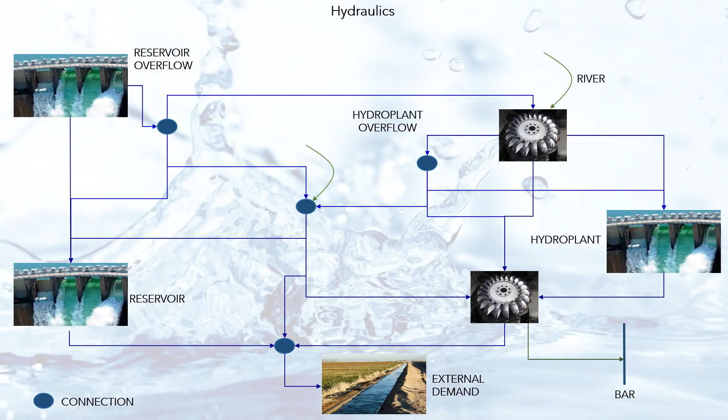Hydraulic model. HAI Water allows any type of connectivity for the topology of the hydraulic system. Modeling of pump storage plants is included, with detailed modeling of pumping stations.

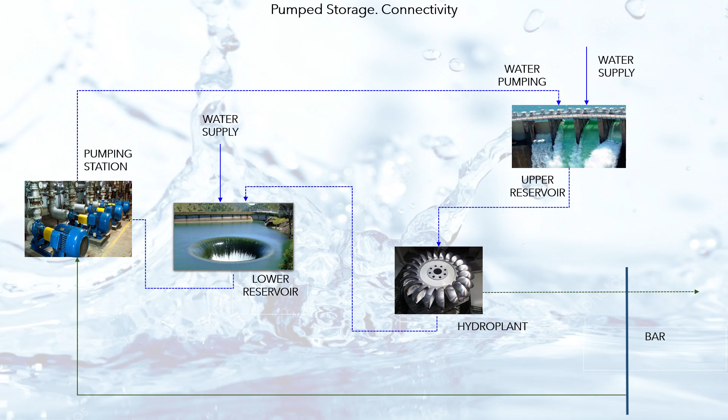If there are special management rules for water resources, such as exogenous agreements for the management of external demands, these can be included in the modeling.

Water systems: subjective penalties. In the modeling of electrical systems, to plan and schedule the dispatch of plants, the use of subjective penalties has been traditional.

This goes back to the beginning of the use of linear models, many of which are still employed, to deal with nonlinear aspects of the real problem.

Some examples of the use of this type of artifice are reservoir discharges, to control early discharges from a low productivity chain to a higher productivity chain, whether technical or economic.

Management of other priority demands, such as irrigation, aqueduct, minimum flows, flood control. Control of the minimum level of tanks to give reliability to the system.

These approaches involve the distortion of the associated dual problem. HAI Water allows the user to select the exact modeling, as an alternative to subjective penalties.

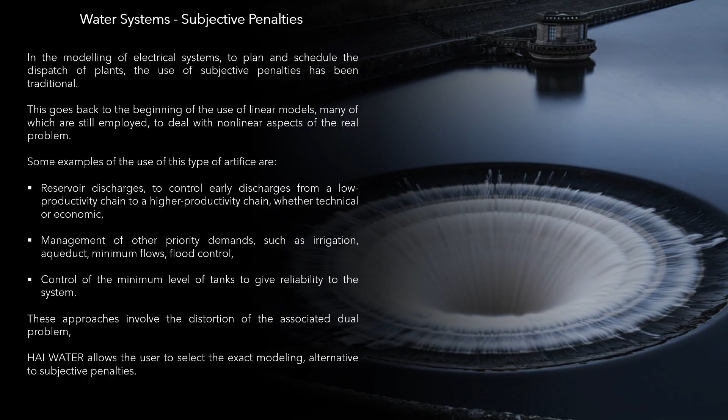The effect on the dispatch of the plants of the penalizing factors of the discharge from the reservoir and the minimum flow, the ecological flow, is presented.

The experiments, and their results, were extracted from a report of users of a dispatch model of normal use in the electrical environment, carried out at the end of the last century.

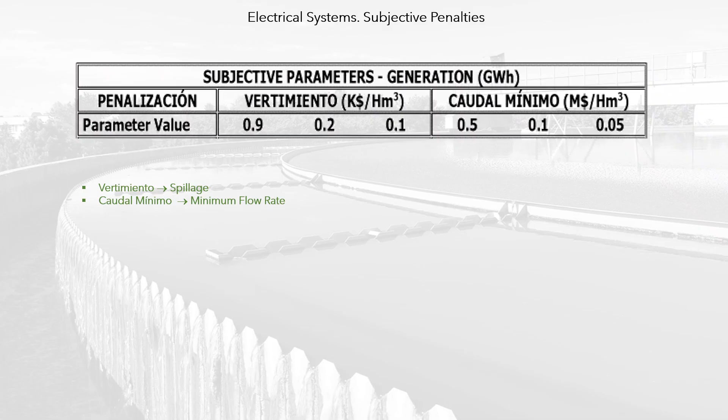For each subjective parameter, 3 values were selected, which are reported in the table. The table presents the average values for generation in each case.

Given the lack of technical support for the parameters, the results depend on the modeler's decision. Assigning the minimum values maximizes hydroelectric generation, which is consistent since, for 0 values, it is equivalent to not affecting hydroelectric generation.

But the quantification of the parameter is not justifiable. On the other hand, maintaining an average flow penalty and maximizing the minimum penalty maximizes thermal generation.

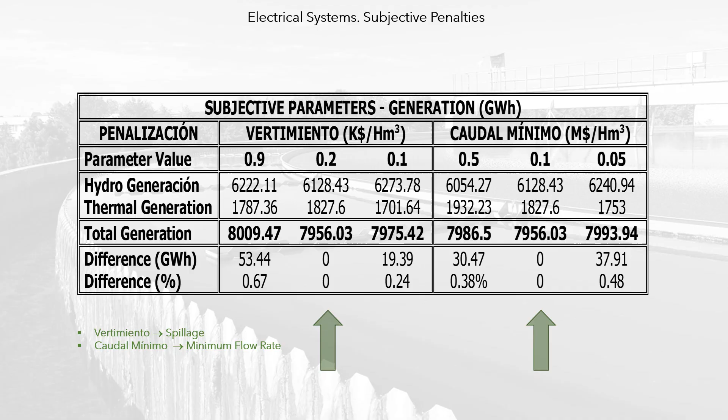The results presented are inconsistent, as a continuous trend would be expected. The quantification of the parameter is not justifiable.

When the water stored in a reservoir cannot be controlled, the reservoir discharges are modeled by a channel, which connects to another reservoir or takes the water out of the system. If these relieved or discharged waters are subsequently used in the system to meet the demand for water and/or electricity,

a mathematical problem can be posed, when the flow implies a greater efficiency in the use of water resources than by the normal route, since they turn the problem into disjunctive programming, which requires the use of binary variables to be solved exactly. The traditional way to avoid the mathematical problem is to include penalties in the objective function,

which does not solve the problem, since in stochastic programming there may be situations in which spillage occurs, but we do not identify it in the results. HAI Water exactly controls discharges from reservoirs and hydroelectric power plants.

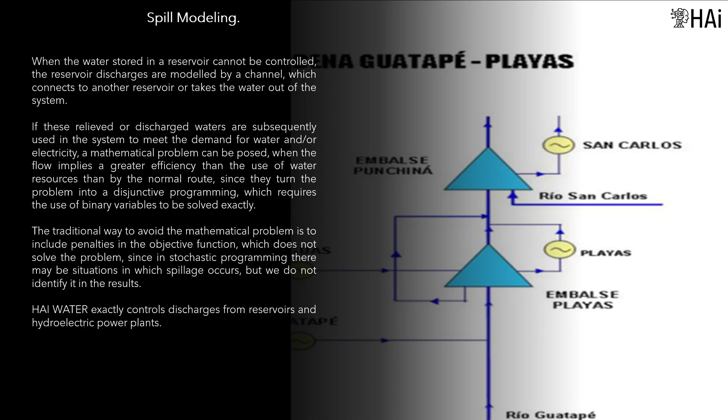Water systems: optimal degenerate solutions. The degeneration of the optimal solution is related to the multiple physical solutions, primal variables, that meet the conditions of optimality and feasibility of the problem.

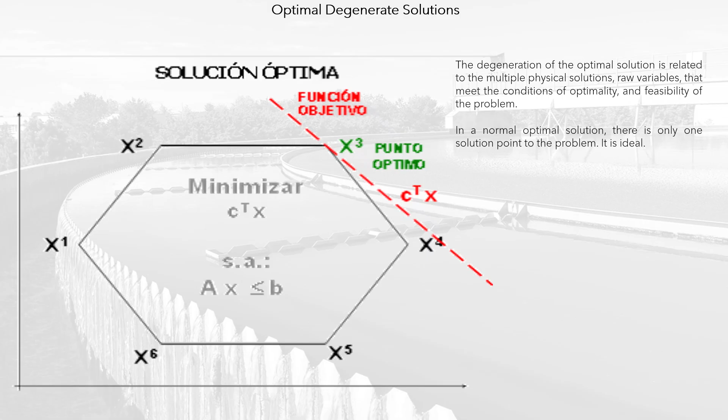In a normal optimal solution, there is only one solution point to the problem. It is ideal. In the degenerate case, the set of optimal solutions is found in the hyperplane that defines one of the constraints, with which it is collinear, or parallel, to the hyperplane of the objective function.

In a convex programming problem, these equi-optimal solutions are in a convex set. The solution algorithms find only one point, among the infinite number of points that make up the convex set.

In the case of hydroelectric systems, the problem arises when there is an imbalance between the supply and demand that the system serves.

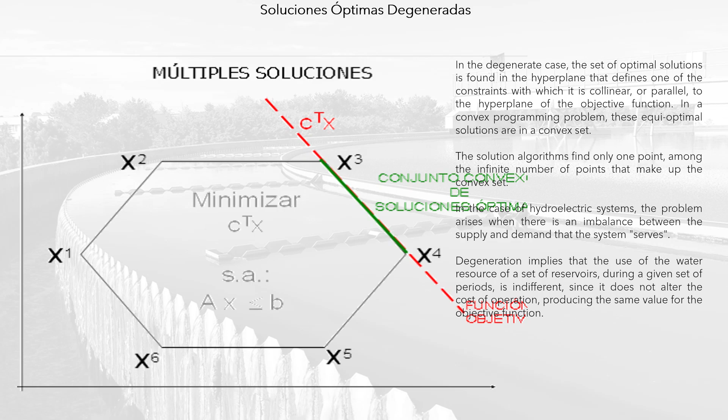Degeneration implies that the use of the water resource of a set of reservoirs, during a given set of periods, is indifferent, since it does not alter the cost of operation, producing the same value for the objective function.

Several important problems arise from degeneration. There is greater difficulty in solving optimization problems, therefore greater computational effort. There is also difficulty in comparing solutions obtained with different algorithms or models, which, being the same, apparently produce large changes while maintaining in all cases the same value of the objective function.

There is a lack of definition of the dual variables at the level of individual reservoirs, and problems in the application of regulations due to multiple remunerations for agents. HAI WATER can solve the problem of the lack of definition of dual variables in chains of storages, physical or virtual, that produce degenerate solutions.

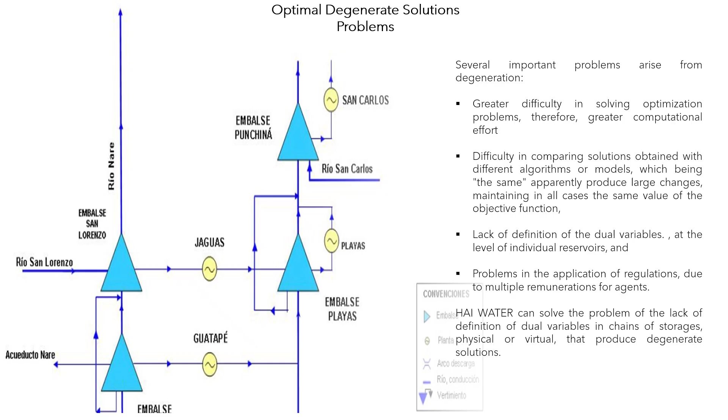Degenerate solutions are presented in reservoir networks, either directly connected or through an electrical transmission system. Degeneration occurs when a reservoir can be used interchangeably, or when it can be used in different periods. As the slack in the system increases, the degeneration increases. Degeneracy is not a modeling problem; it is mainly due to the data that causes it.

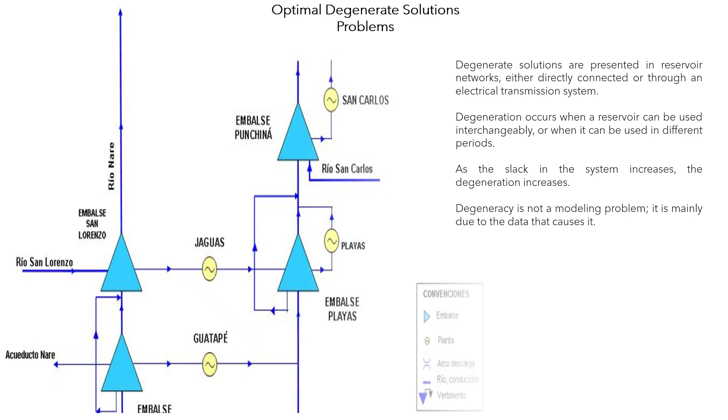Modeling the water system: according to their efficiency for energy transformation, there are two types of hydroelectric power plants. Fixed loading plants consider an efficiency factor for the plant independent of the head of a reservoir associated with the plant. Plants with variable head consider an efficiency factor for the plant that depends on the head of a reservoir associated with the plant.

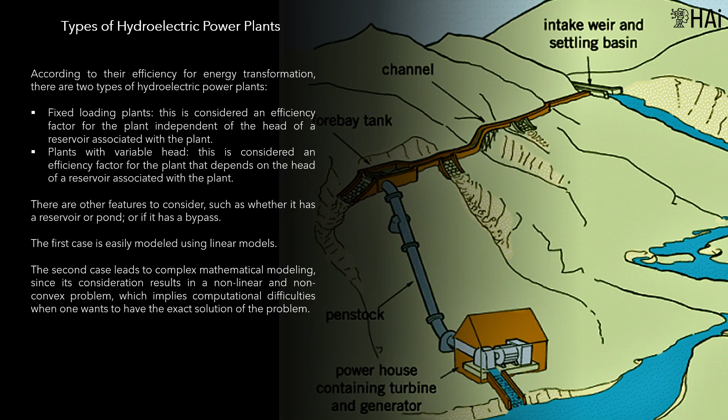There are other features to consider, such as whether it has a reservoir or pond, or if it has a bypass. The first case is easily modeled using linear models. The second case leads to complex mathematical modeling, since its consideration results in a nonlinear and non-convex problem, which implies computational difficulties when one wants to have the exact solution of the problem.

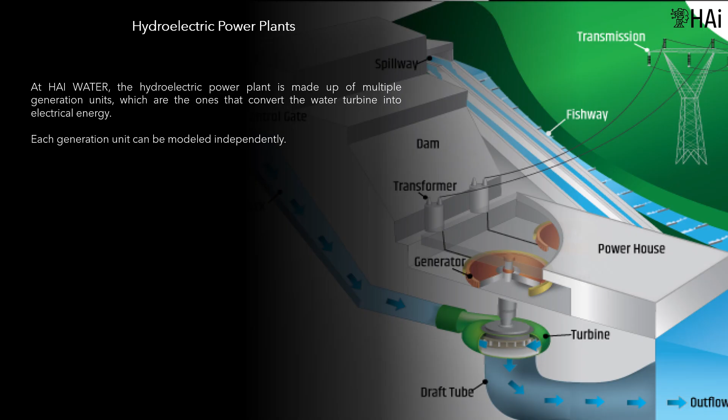At HAI WATER, the hydroelectric power plant is made up of multiple generation units, which are the ones that convert the water turbine into electrical energy. Each generation unit can be modeled independently.

There are multiple types of turbines, the most well-known being Pelton, Francis, and Kaplan. Although their objective is the same, electricity generation, each of them is differentiated by the areas of feasibility of the operation, and the efficiency curves of the transformation of kinetic energy into electricity.

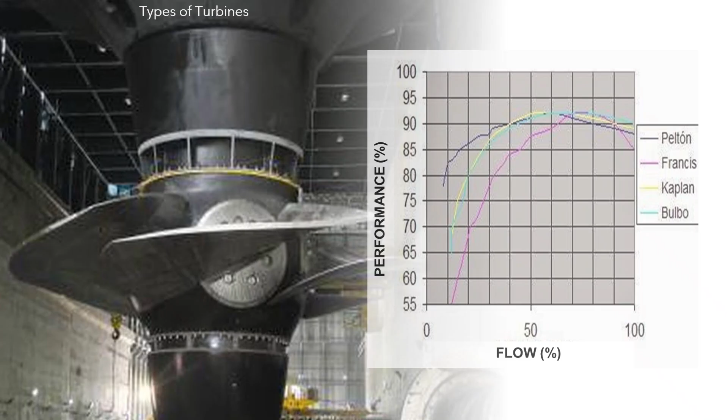These curves are convex, reaching maximum efficiency before 100% of the turbine's capacity. Ignoring this feature in optimization implies an inefficient use of water, since when operating close to the capacity of the turbine, a linear approach will tend to operate the turbine at 100% of its capacity.

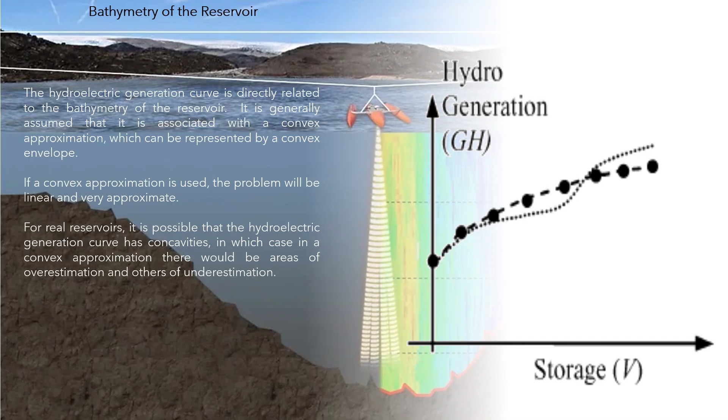The hydroelectric generation curve is directly related to the bathymetry of the reservoir. It is generally assumed that it is associated with a convex approximation, which can be represented by a convex envelope. If a convex approximation is used, the problem will be linear and very approximate. For real reservoirs, it is possible that the hydroelectric generation curve has concavities, in which case a convex approximation would result in areas of overestimation and others of underestimation.

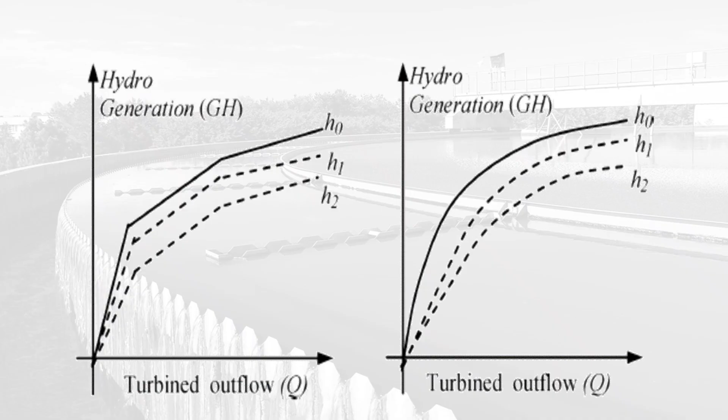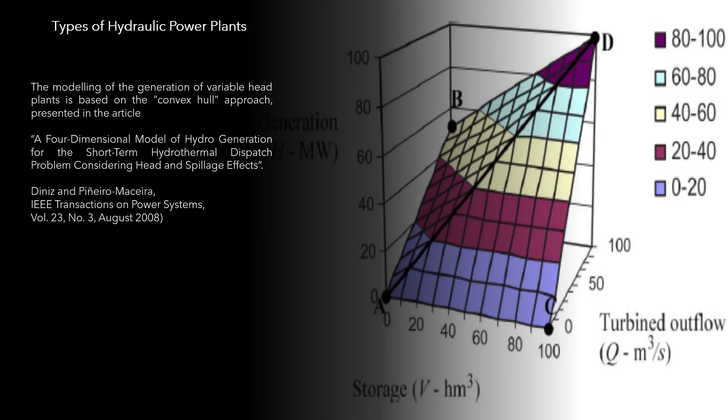At high water, the modeling of variable head plant generation is based on the convex hull approach, presented in the paper 'A four-dimensional model of hydrogeneration for the short-term hydrothermal dispatch problem considering head and spillage effects.' The convex hull corresponds to the discrete minimum envelope, which contains all the points of the hydroelectric generation function, in megawatts, depending on the turbine flow rate, in cubic meters per second.

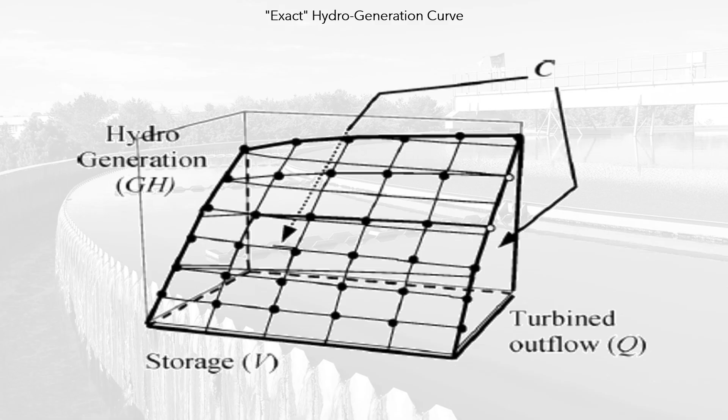The approach is based on the discretization of storage and flow from a network of points, for which the hydrogeneration function can be accurately evaluated.

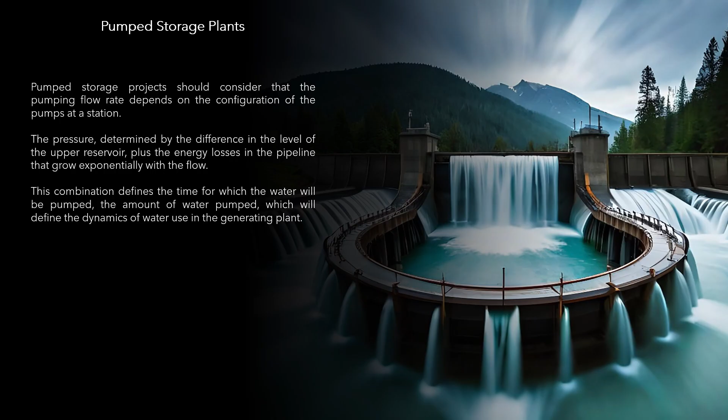Pump storage projects should consider that the pumping flow rate depends on the configuration of the pumps at a station, and the pressure, determined by the difference in the level of the upper reservoir, plus the energy losses in the pipeline that grow exponentially with the flow. This combination defines the time for which the water will be pumped and the amount of water pumped, which will define the dynamics of water use in the generating plant.

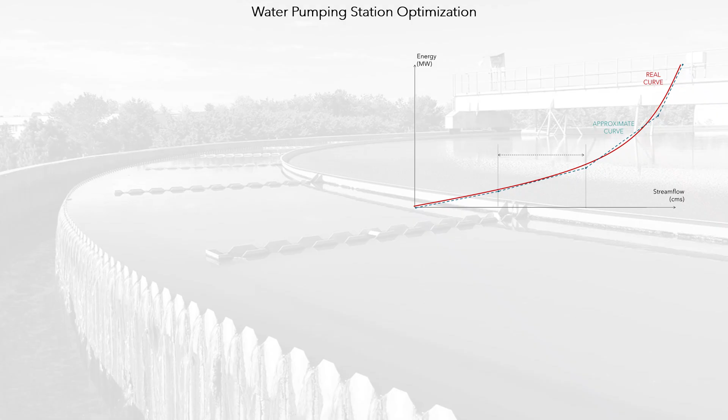The simplest simulation method is to model the aggregate operation of the pumping station, based on a nonlinear exponential function, which could be approximated by a linearized polyline in parts. This can be feasible in tactical or strategic models.

The alternative, perhaps necessary for large plants of this type, is detailed modeling of the operation of the pumping station. The mathematical problem is quite complex, of the MINLP type, mixed integer nonlinear programming. Based on High's experience in pipeline projects, High Water includes detailed, convex hull-based modeling of optimal pump station operation.

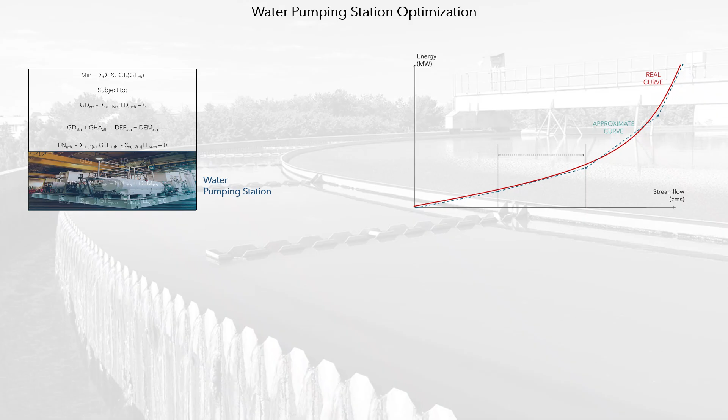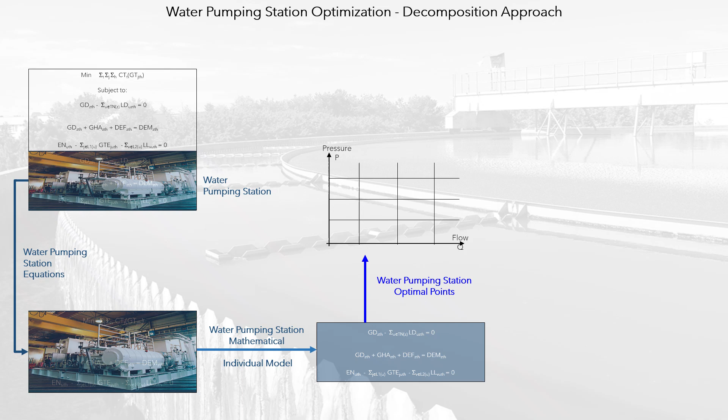The first step is the decomposition of the problem, generating the convex hull of the entire pumping station. This process involves extracting the pump station model from the monolithic model. With this model, the convex hull will be produced, which will be represented by a mesh of flow-pressure points. For each point of the mesh, the problem of optimizing the operation of the pumping station must be solved.

Since the product to be pumped is water, which does not dynamically change its characteristics, the process results are stored in a permanent database, for later use in the piping system optimization model. This process can be done offline, prior to the use of the optimization model. The integral model must incorporate the equations that allow working with the convex hull to determine the flow and pressure of the station.

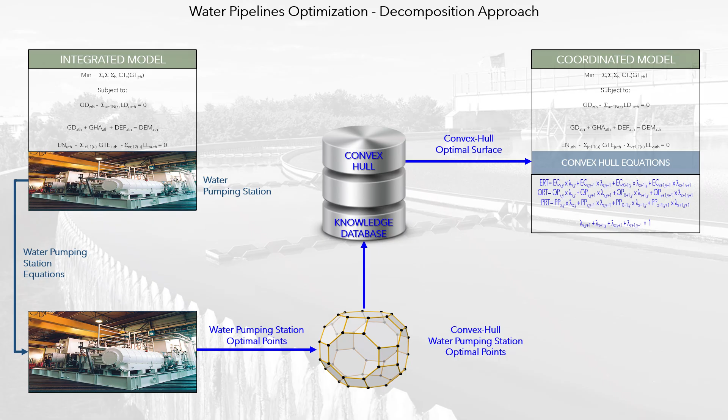HAI WATER can also consider the evaporation of water in the reservoirs, which can be a function of hydroclimatic variables, together with the water level in the reservoir, and evaporation control measures.

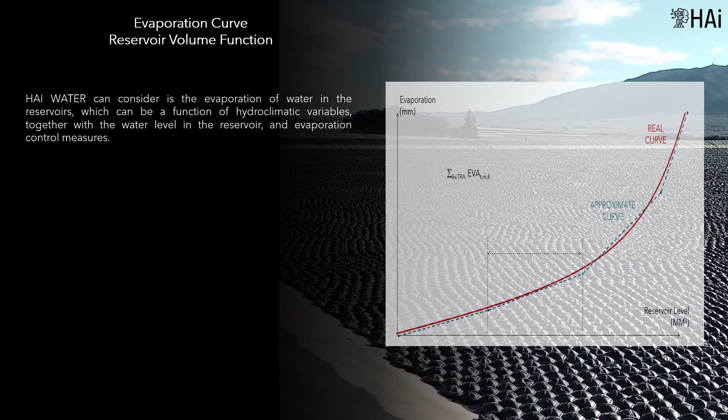Synthetic flow generation. For water resources, there are several synthetic generators available. The first can be supported by statistical models of multivariate synthetic generation, such as Thomas-Fiering. This type of model, aimed at preserving the mean, may have limitations when it comes to representing the tails of the probabilistic distribution. The second, commonly used, is based on the extraction of segments, subseries, from the historical series.

The theoretical basis of this methodology is: historical series are a sample of a process that has occurred in real life, which is assumed to be stationary and returns to the mean in t years, on a monthly or weekly basis, depending on the frequency of data in the historical series.

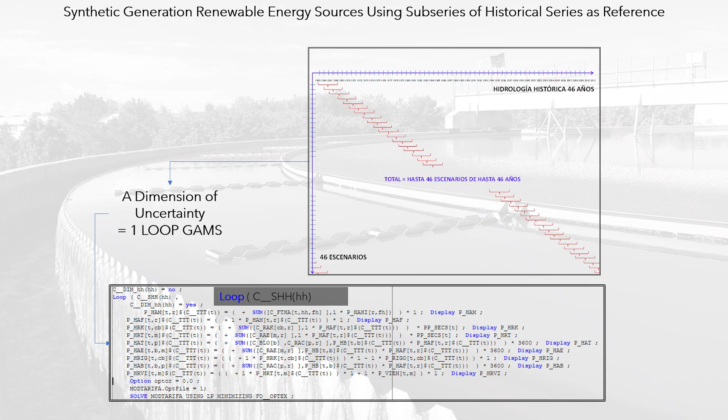The historical series preserves the expected value, the cross correlations, lag 0 and lag 1, of all hydroclimatic variables, and the historical series contains extreme events that have occurred, and therefore some of the subseries are linked to these events that preserve the tails of the probabilistic distribution. The modeler can choose the historical subseries to use, considering some indicator of criticality, of a lot or a little water.

The third, developed by HAi, is supported by the analysis of ENSO events, the El Niño Southern Oscillation, which has been shown to determine energetic climatological variables, such as water input, wind speed and solar luminosity. The ENSO is a fundamental variable for forecasting events that may occur in the Pacific Basin countries, but its effect has an impact on a global level.

The importance of ENSO events has given rise to a large amount of research, with multiple models aimed at predicting ENSO events in the short and medium term. The International Research Institute for Climate and Society, IRI, at Columbia University, publishes results obtained with two methodologies to project the ENSO index. Subjective, based on a consensus between analysts from the CPC, Climate Prediction Center, and the IRI. Objective, based on a Bayesian regression model of integration of prediction models from multiple sources, which determines the weighting factors of each of the available models.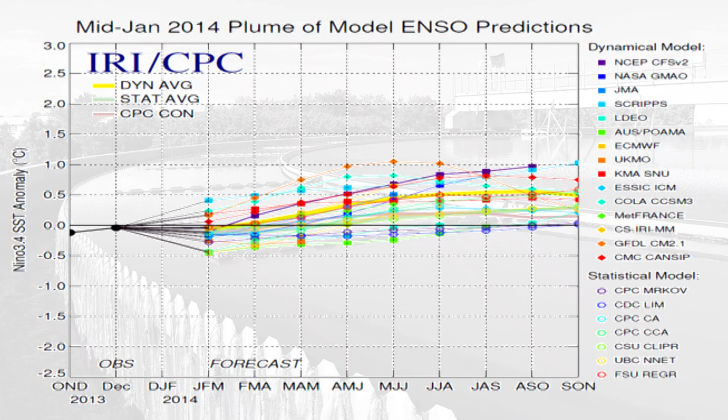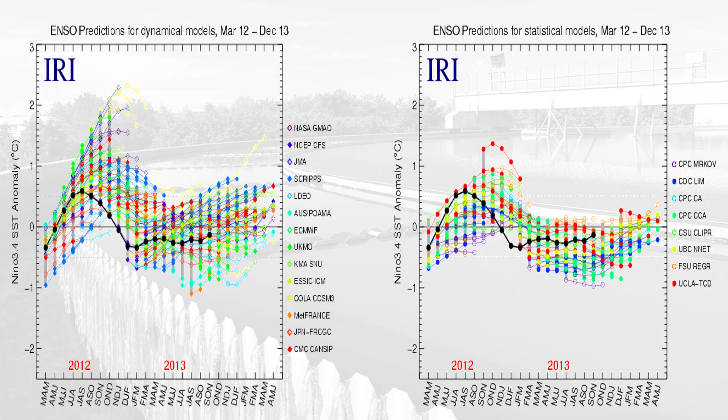Two types of prediction models are used. Dynamic, based on the physical modeling of the dynamics of the process, and statistical, based on empirical evidence of the process. The graphs include the prediction made with each type of model. The black line indicates the weighted prediction using the two types of models. The graph presents the predictions of the models included in the IRI studies and the Bayesian model of forecast consolidation, in the case of statistical models.

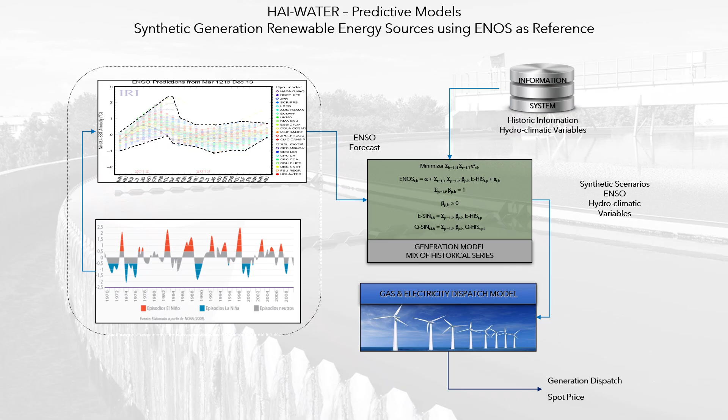The HAI methodology is based on the integration of IRI's ENSO prediction with the observed historical series of climatological variables. The ENSO HAI model uses an optimization model, the result of which is the convex combination of historical series, which represent the best synthetic scenario generated from the statistical characteristics of the IRI forecast.

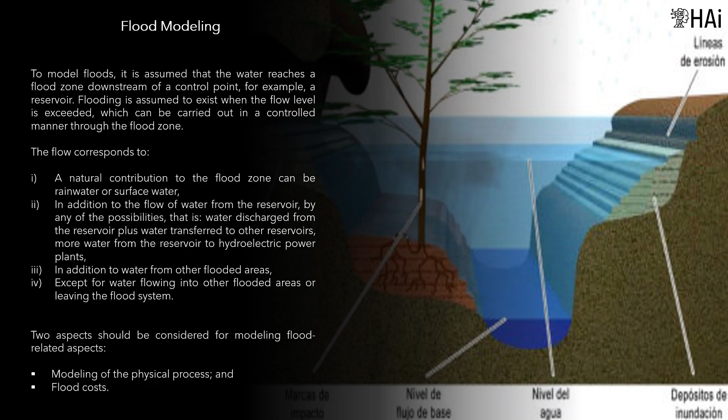Two aspects should be considered for modeling flood-related aspects: modeling of the physical process, and flood costs. The physical flooding process involves coordinating two processes, the monthly dispatch of water resources, with floods occurring within the monthly period, based on characteristics that change from month to month. To achieve the above, the monthly period is divided into two periods.

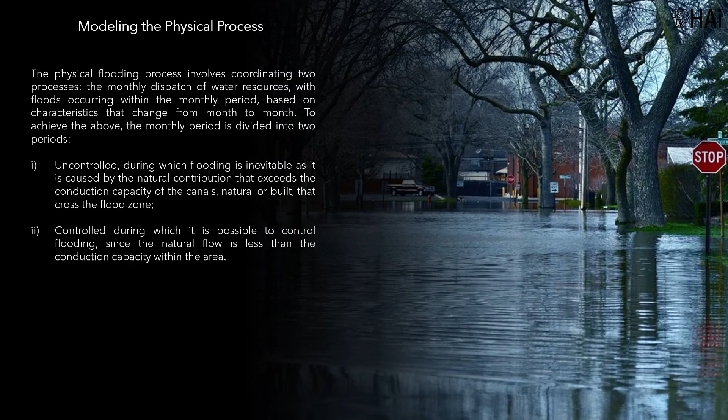Uncontrolled, during which flooding is inevitable as it is caused by the natural contribution that exceeds the conduction capacity of the canals, natural or built, that cross the flood zone. Controlled, during which it is possible to control flooding, since the natural flow is less than the conduction capacity within the area.

It is assumed that flooding generates costs associated with the amount of water that floods an area, here called discharges. Depending on the volume of water that exceeds the capacity of the flooded area, a flood cost with nonlinear characteristics is considered. To this end, the incoming flow is composed of several sections in such a way that the nonlinear features are considered by means of a linearized curve by sections. Each branch of the flood cost curve is delimited to ensure proper representation.

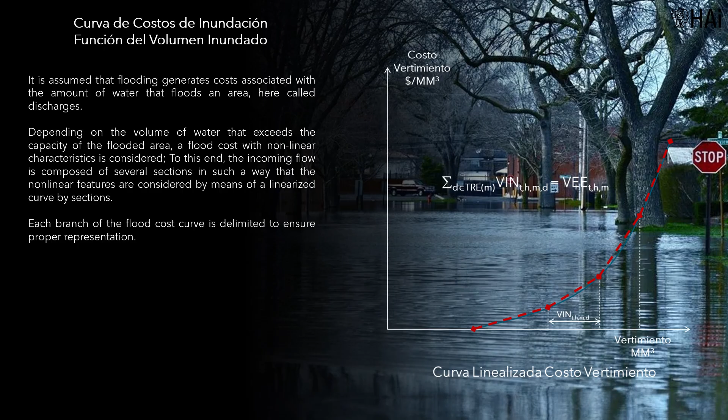Aquifer and Contamination Dispersion Model. HAI WATER has a generic mathematical modeling framework for complex water resource systems, which must be optimized based on difference or finite element models. The optimization model is two levels. At the higher level, there is an optimization model associated with strategic and operational decisions that determines the parameters and/or boundary conditions of a finite difference model at the lower level, which represents the complex water resources system.

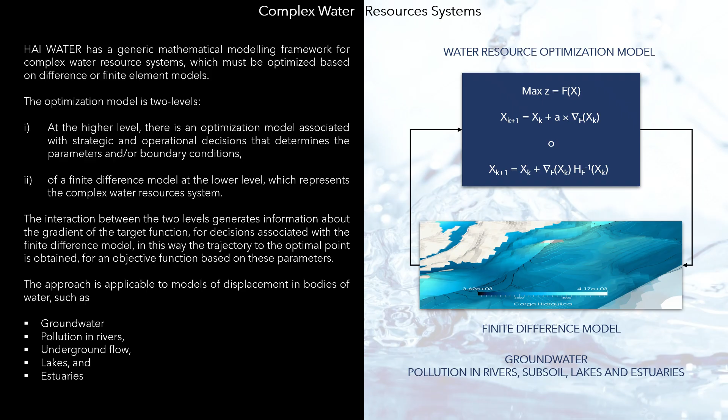The interaction between the two levels generates information about the gradient of the target function, for decisions associated with the finite difference model. In this way the trajectory to the optimal point is obtained, for an objective function based on these parameters. The approach is applicable to models of displacement in bodies of water, such as groundwater, pollution in rivers, underground flow, lakes, and estuaries.

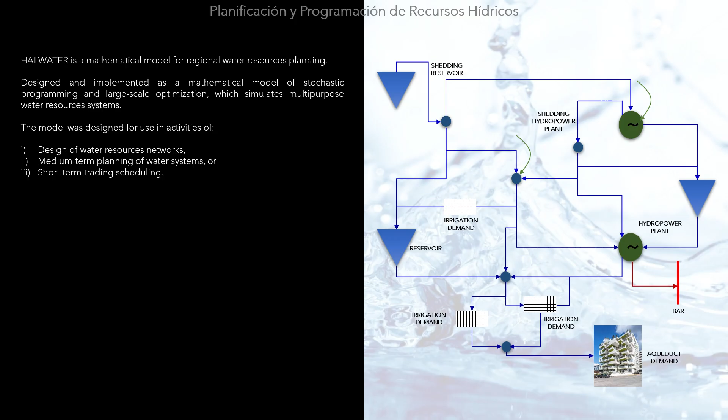HAI WATER is a mathematical model for regional water resources planning. Designed and implemented as a mathematical model of stochastic programming and large-scale optimization, which simulates multi-purpose water resources systems. The model was designed for use in activities of design of water resources networks, medium-term planning of water systems, or short-term trading scheduling. Water resources network models.

Optimal design of mesh water supply systems. HAI WATER includes a mathematical optimization model for the design and redesign of aqueduct networks, and the automatic reconfiguration of the equations when check valves are activated during operation. The model is of the mixed linear programming type, oriented to work with commercial diameters.

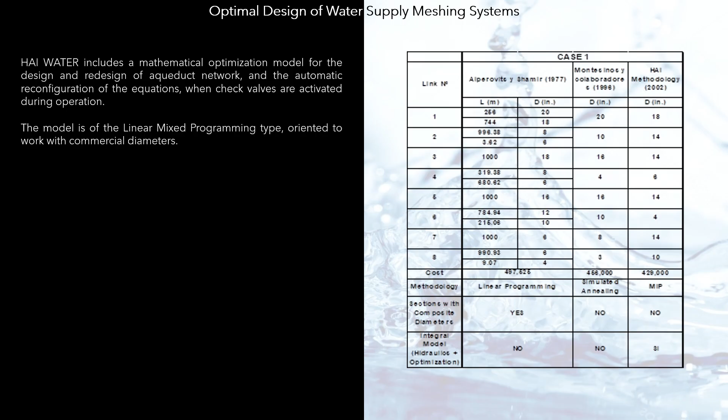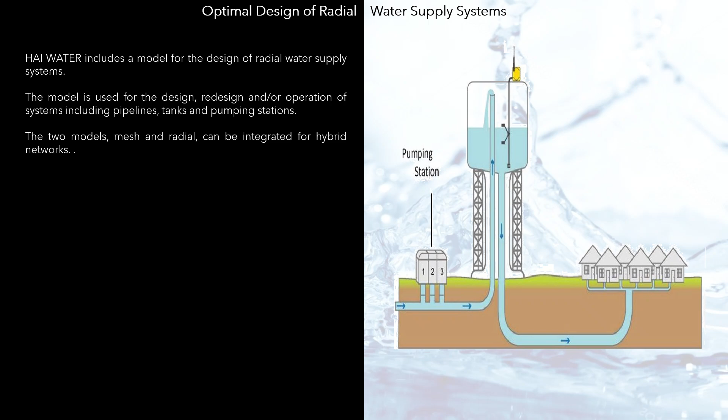Optimal design of radial water supply systems. HAI WATER includes a model for the design of radial water supply systems. The model is used for the design, redesign and/or operation of systems including pipelines, tanks and pumping stations. The two models, mesh and radial, can be integrated for hybrid networks.

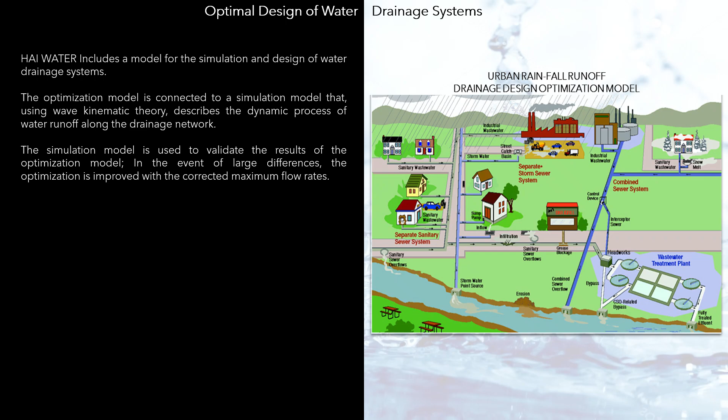Optimal design of water drainage systems. HAI WATER includes a model for the simulation and design of water drainage systems. The optimization model is connected to a simulation model that, using kinematic wave theory, describes the dynamic process of water runoff along the drainage network. The simulation model is used to validate the results of the optimization model. In the event of large differences, the optimization is improved with the corrected maximum flow rates.

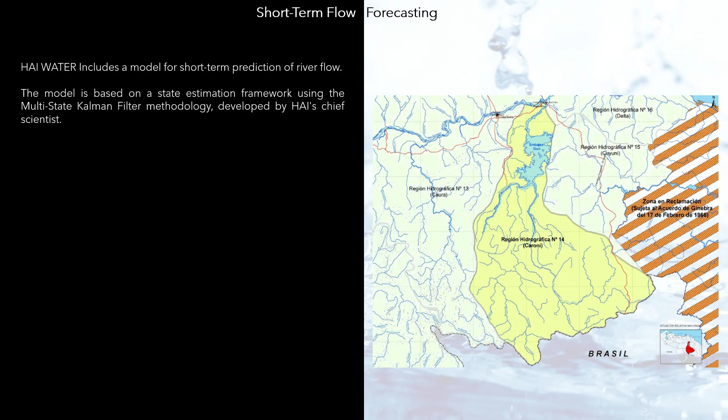Flow prediction model. Short-term flow forecasting. HAI WATER includes a model for short-term prediction of river flow. The model is based on a state estimation framework using the multi-state Kalman filter methodology, developed by HAI's chief scientist.